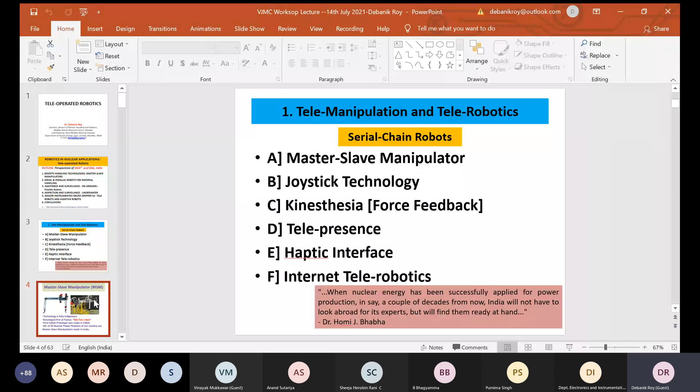So this is the first of our technologies, master slave manipulator, which we call MSM. This technology today is fully indigenous. We are very proud to tell you that this technology became fully indigenous over the years, though of course there was a lot of struggle along the way. Even in the world, it was first developed in France, known as the MA Telerobot.

The first Indian prototype was made in the 60s. We took a lot of input from this French telerobot, but the Indian one was a mechanical type master slave, the first ruggedized kind of system. Of course, those particular units are not in use in Indian power reactors these days, but it was our glorious past, you can say. All of the present 23 nuclear power reactors use master slave manipulators that are totally made in India. So that is the kind of structure we are right now having.

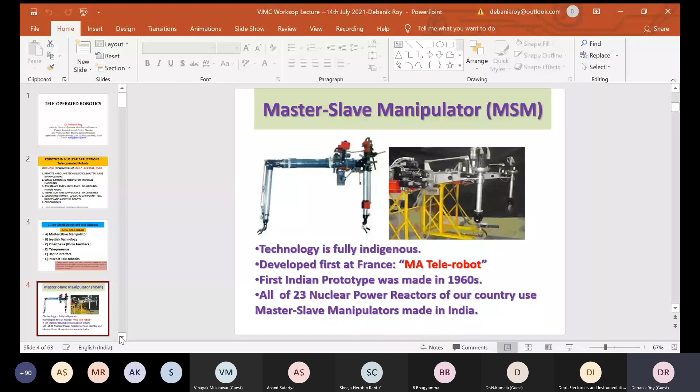Similarly, at more or less the same time as the French research, in the US at Argonne Lab there was also a development made - this is the Argonne Lab slave manipulator used at that time. There are some differences between this French and US version, and the Indian version is more linked to the French version - we took significant input from it.

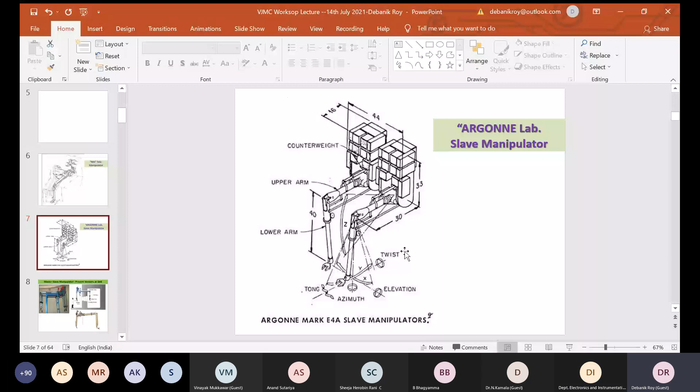This is the present version at DAE, these MSMs, and these three pictures are actually the development of the prototype that has been made fully in our workshops, and those are now in operation in nuclear power plants.

Essentially, the idea is like a master arm, which is being handled by an operator, and there is a through-tube, and there will be a kind of slave arm which is inside the hazardous zone. We generally call it a hot cell - hot doesn't mean temperature-wise, it's basically radiation hazard-wise. There is a viewing window through which we see whether the slave arm is doing the job perfectly.

If you look at these pictures, you will find some kind of peculiarity in the gripper part. This gripper of the master slave manipulator is totally different from a normal robot gripper, and the wrist also. Those are the things where we feel it is the best one.

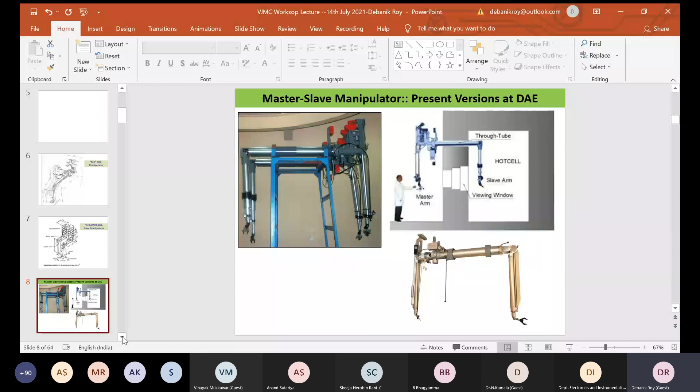Various configurations of master slave manipulators have been developed over the years in Department of Atomic Energy. Out of that, one interesting type is the gantry type, which was totally our own design, used for specific applications in our waste disposal facilities. This is one of our success stories.

A lot of R&D went into this. These were big projects in the early 70s and 80s, with a lot of analysis and R&D involved. We must keep in mind that the 70s and 80s were a dreadful period for atomic energy because we were under embargo, so we couldn't get good software or hardware, and everything was made primarily at home. All the analysis, like kinematic analysis and design, which are very important for any mechanical system, was done by our own engineers and technologists.

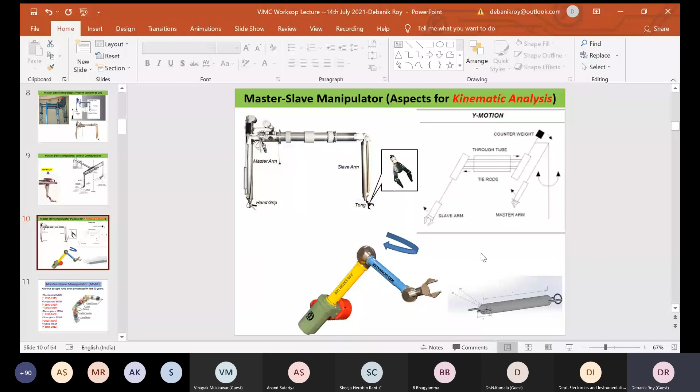That is the reason we started from scratch, and today this is an important milestone that we have achieved. As I was mentioning, in MSM, various designs have been prototyped over the last 50 years.

We started with mechanical type MSM from 1955 to 75, the first 20 years of DAE's functioning. We moved on to something more robotic, called articulated MSM, in the 80s and 90s, roughly 1980 to 1990. We also had an interesting development during that time called the servo manipulator or servo MSM. This was not prototyped for production since it was only for R&D use, and we didn't use it in the nuclear power plant. The next important development that went into power plant areas is called the three-piece manipulator, three-piece MSM.

From 1995 to roughly 2002, I was also part of the family, so I have particularly seen the developments of the 3-piece manipulator, 3-piece MSM. Then, of course, there was the 3 to 4-piece version. Not much difference technologically, but manufacturing-wise there were a lot of additions during this phase. That was the concept.

Finally, in the recent past, around 2010-12, the hybrid MSM also came into the picture. Essentially, the hybrid one and the 4-piece manipulator are more on the robotics side. We developed a lot of gear systems, gear motors, clutches, and other things for these. Whereas the mechanical master slave manipulator is totally mechanical, there was nothing other than rope and structures. Those are the differences that actually happened.

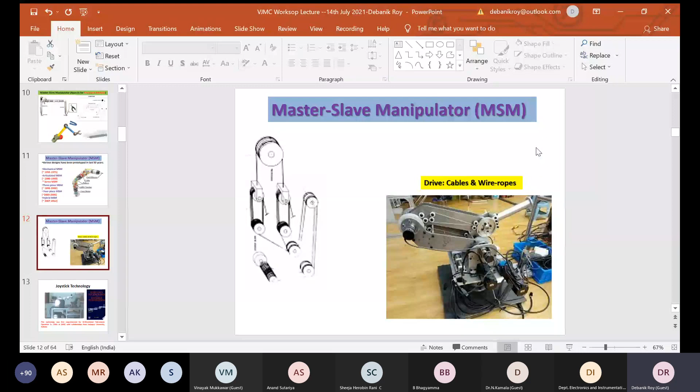Next is the joystick technology, another very interesting technology developed by the Department of Atomic Energy. This was first experimented during the 1990s at BARC in collaboration with Jadavpur University, Kolkata. I was part of this program, and this technology was very universal—through a joystick, or a kind of serial robot, we could operate various configurations of slave manipulator.

That was the need of the hour during those times—apart from master slave manipulators, we needed a universal device that could control various small-size robotic devices. You have to consider that the advent of robotics in atomic energy and nuclear power plant areas was in the 1990s. Many small robots were being thought of to be controlled, and joystick technology had a role in that. I am just giving glimpses because time is short.

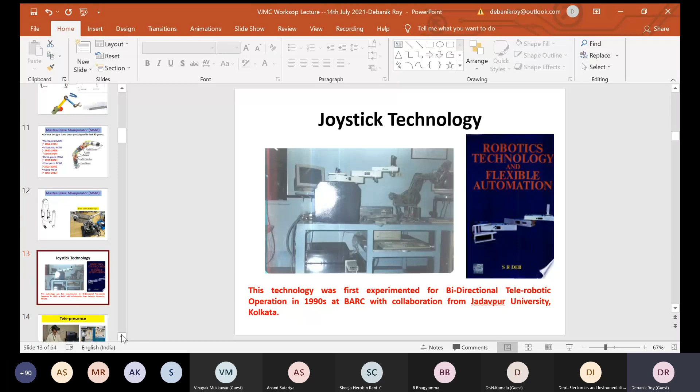Now, telepresence—the next technology experimented with in the later part of the 1990s, around 1994, at the Division of Remote Handling and Robotics, our primary division for robotics research at BARC. It was experimented with and we had very successful developments initially from the lab scale. Then we had advanced experiments with MSM around 2006 to 2009, as shown in the right-hand side photograph.

So a lot of advanced experiments we have done during that period. Haptic interface is another new technology developed with collaborations from IIT Kanpur in the latter part of the 1990s, I think 96, 97. Those were the days where we used to experiment with some collaborations, and collaboration was important for our procurement purpose, to be very frank, because embargo was still going on those days, so we couldn't purchase many things as we thought of.

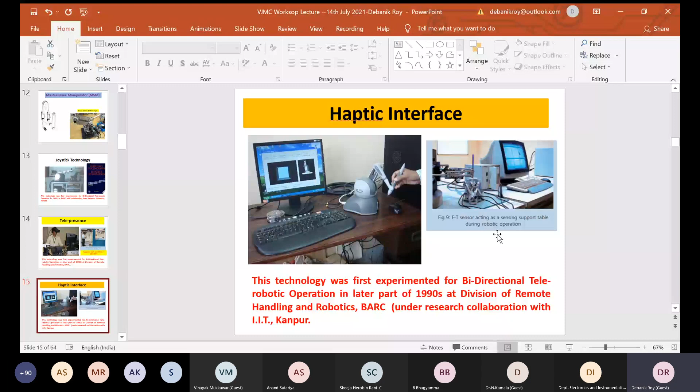Now there are many open problems even today, as our young engineers and scientists join, so we give them research problems. One area where we need good collaboration is modeling of cables and wire ropes, pulleys of master slave manipulators, modeling of the wrist of the master slave manipulator. These are areas where intense research is needed: modeling of serial chain joystick with chain sprocket mechanism, input of human factors in telepresence and haptic interface of master slave, and augmentation of software simulation with LabVIEW and MATLAB.

So these are the things used in our arena, and we feel this kind of progress has to be made with existing and known technology. So this is the area.

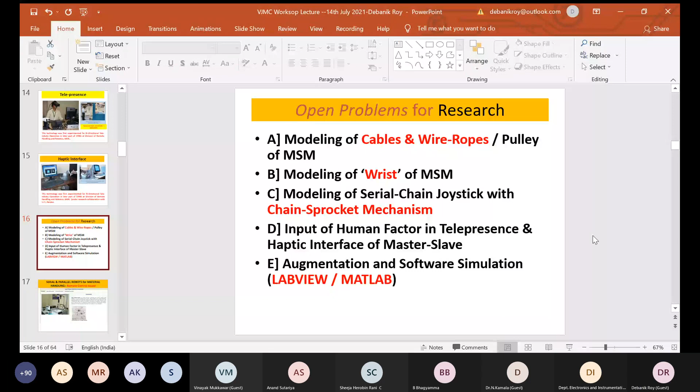With the advent of master slave manipulators and the knowledge acquired for remote handling technology, we started moving to a lot of serial and parallel robots for material handling, and these developments are all remote control based. Initially we did a normal control system, but then we switched over to remote control.

One interesting chapter of Department of Atomic Energy's robotics research is with parallel manipulators, and there are a couple of indigenous technologies developed in the Division of Remote Handling and Robotics during the early 2010s under the 10th and 11th five-year plans. Generally we do R&D in the five-year plan method; after the 12th five-year plan there is no more five-year plan. During those times, this was one technology that was fully indigenous, and we developed a lot of R&D input through that. In fact, it is well appreciated all over the country and the world also.

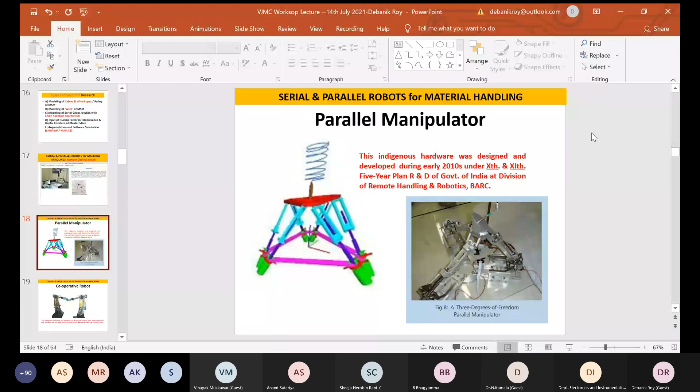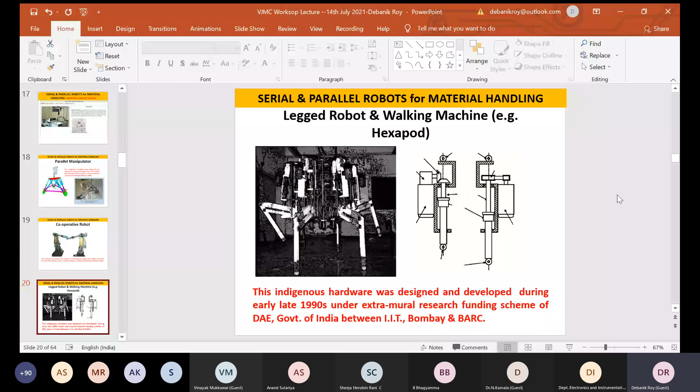There was another remote control, not remote handling I should say, with a legged robot and walking machine, basically the hexapod, in the late 1990s, where with IIT Bombay we developed this technology called Nataraj, basically the first Indian indigenous legged robot system. That was also one of our success stories, and there are other machines and prototypes developed after that, but the first one was Nataraj.

We have something in laparoscopic and surgical units also. Many of these technologies were first experimented with a normal controller, normal systems, but then we moved to some kind of remotized systems.

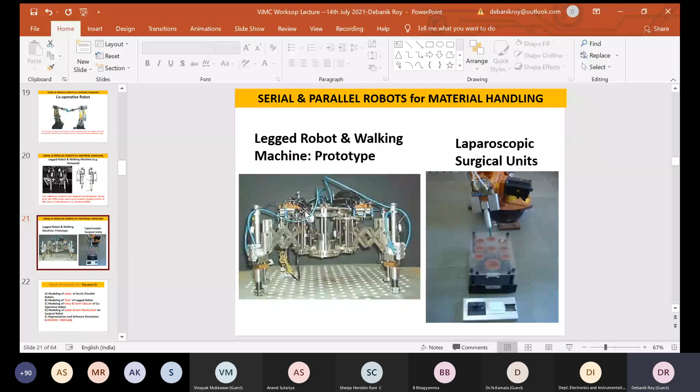So there are many areas where research happens in our establishments, like modeling of joints of serial parallel robots. Joint is a very interesting structure, giving basically the motion transmission systems and all. And modeling of gait of the legged robot, modeling of force and form closure of cooperative robot, modeling of cable-driven mechanism for surgical robots, and again the LabVIEW MATLAB augmentation.

This part we are very much stressing in our young engineers and scientists: you have to augment with some well-known software platforms, and these days a lot of open source control algorithms are available. But this glimpse I am giving is from when it was not so common, that is the early 2000s and that kind of period.

Let me take you to the next level of journeys of Department of Atomic Energy, where personally I am totally involved, and this is my project only. For the last 10 to 12 years, I've been mostly engrossed with flexible robots development, basically for assistance and surveillance purposes, which the Department of Atomic Energy needs very badly.

From our initial development, some of the flexible robots today have a kind of remote control based system, starting from Wi-Fi, and we've developed up to that level. There are indigenous hardware and design. So A to Z is kind of indigenous here. I can say it is my own, and some of my team members were also there.

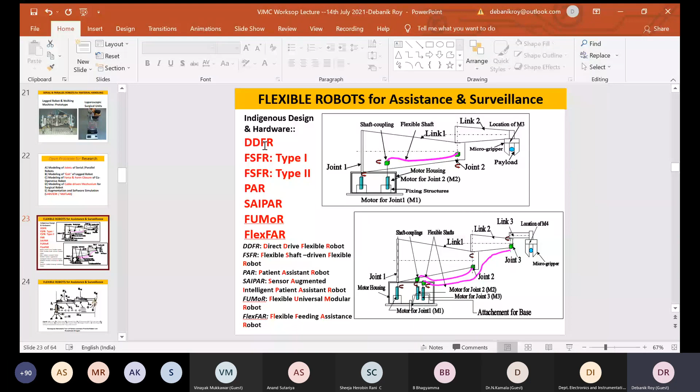So this is the total gamut of our flexible robot research, which started with DDFR around 2008-9, and then the other things started, and the latest, a few more, we just completed this year only. So this is a general picture, a kind of conceptualization.

This is a schematic view of a patient assistant flexible robot with a gripper. We can have this kind of structure, with motors placed at the different joints. Of course, our prototype patient assistant robot is not with motors at the joint—it was motors at the base, and then we can have it with a flexible shaft. We are moving it actually.

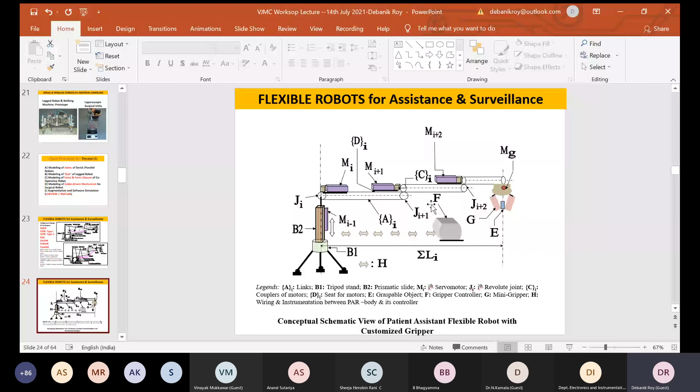Now, from a theoretical point of view, there are many fundamental things associated with flexible robot technology, because we have to design the link, the flexibility aspects, and of course how to control it. As you can see, this is very sleek and slender, so controlling that thing in real time is a big issue, and that particular aspect has always haunted us.

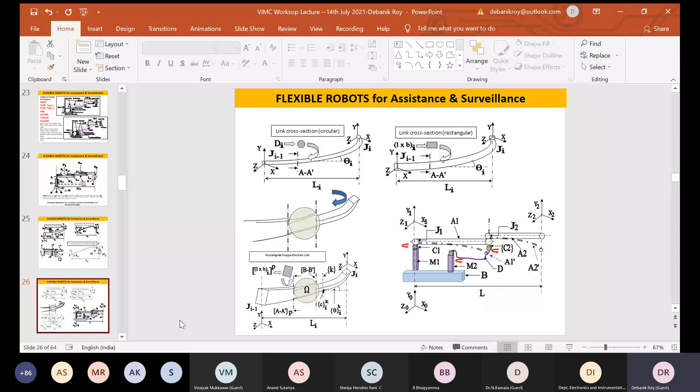A lot of indigenous effort went into controlling this vibration of the flexible robot, and many theoretical paradigms and modeling went into this structure. Here I'm giving a schematic diagram to show how the cross section changes—we can have a circular cross section, a rectangular cross section, some stepped configuration, etc. So there are many variations possible, and these give details of our activity.

This particular structure has a kind of tripod structure, which gives a vertical motion so that you can adjust the height of the robot where it is working. As you know, if it is a patient assistance system in healthcare, in hospitals, we need to adjust according to the patient's bed. Even for surveillance, we need to adjust the height and see the locations depending upon the structural things.

One important idea - some of the photographic views are available with the DDFR type of things, which is our first development, and this was a very success story. This particular joint assembly is being made. We have used Faulhaber Swiss miniature motor and the controllers also. All those controllers are bought out items - the controller of the Faulhaber and the motor itself - because that time we were a little fortunate that the embargo was partially withdrawn, so we could get some overseas motor. Of course it is from Switzerland, so there was not much of a problem, but even then we could do it.

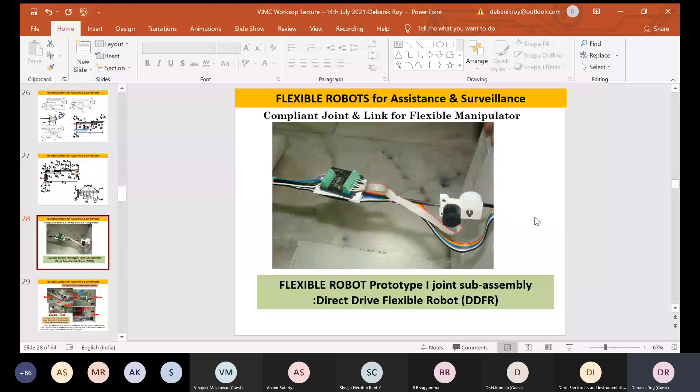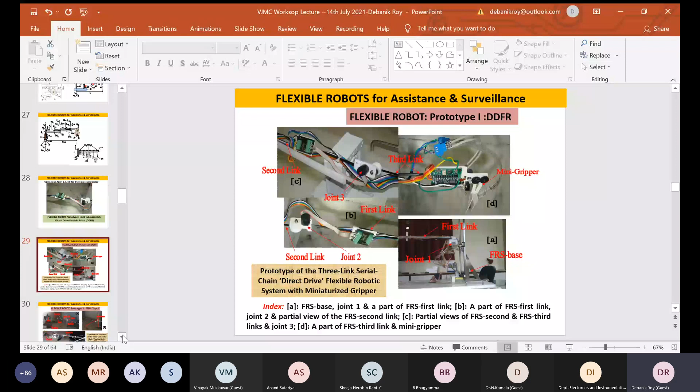Now, with the success of DDFR, we moved to the FSFR type 1 and type 2. The concept was, can we have some kind of unification of the joint systems, and can we place the joint motor at the base itself? That was the concept, because in the earlier version, if we place the motor along with the link, the weight will increase, causing more deflection or other problems.

So with that idea, our FSFR type 1 design came, and these photographs are all inside our laboratories and work zones. These motors were placed at the base, and then we could see the full system. There was a very miniaturized gripper at the end, with a 3-link system. We experimented a lot of things.

This FSFR type 2 was a little more advanced, where we changed the material of the link. In FSFR 1 we used aluminium to have a proof of concept, whereas in FSFR 2 we used a more lightweight but stronger material called CFRP, carbon fiber reinforced plastic. We have papers and other material available, and even two YouTube videos where you can see this - I will show the video also.

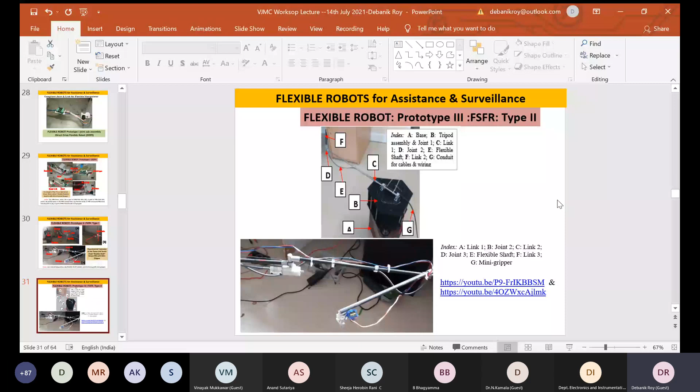So these are some of the details of FSFR, and then we move to the next version, which is PAR, the patient assistant robot. Whatever problems we faced in FSFR 2, we removed in PAR. In PAR we actually moved with a kind of technology for its tripod mechanism and vertical up-down motion. That was the criteria where we could concentrate more, and also our indigenous controller. So that was the difference between FSFR 2 and PAR.

So these are all chronological - one after another we started and conceptualized. As I mentioned, the DDFR program started around 2008-9, and then we experimented with all those things. Then we slowly moved to FSFR type 1, but there was a considerable gap because we were not very sure how to get the flexible shaft, and it was not available those days. So some time was lost in that. Anyway, then we picked up, and I think from 2015 onwards we could get all the materials and started again with full pace.

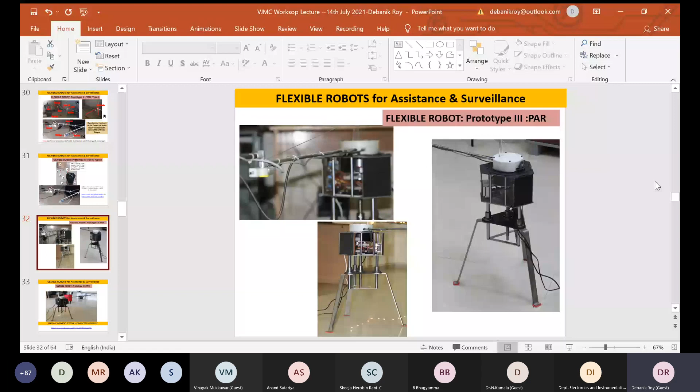This is today's prototype of PAR, patient assistant robot, which is fully operational and functional in our laboratories. This is the complete prototype, which has got a YouTube video also. There was a technology partner in Pune who helped us in developing the full system based on our design and parameterization.

With the success of PAR, the working prototype, we moved to another interesting project in the later part of 2018. This is called SAIPAR, Sensor Augmented Intelligent Patient Assistant Robot, and a lot of modeling went into it. This prototyping is in progress right now, but we have changed several items, from the joint to many other small things, to make it more versatile and more receptive. It is intelligent in the sense that we have designed many sensors for it. It depends on the technology - now we are having a lot of advances in sensor technologies, controller technologies, software. So those aspects also come into the picture, and the augmentation becomes a reality.

So we are taking help of that. From the simple joint of our joint design, we move to many advancements of the Revolute joint here. Even the gripper, etc., is being changed.

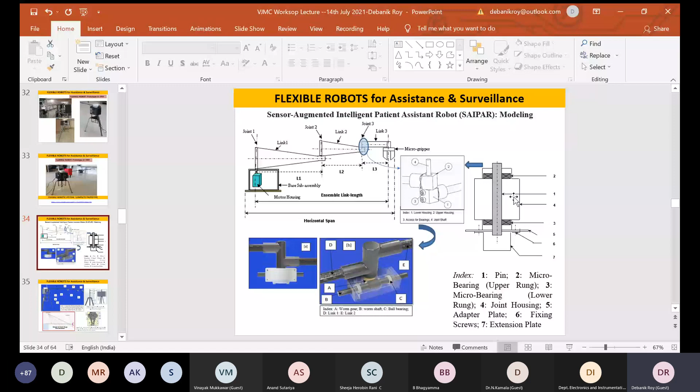The scheme for strain gauge instrumentation - the instrumentation part is more in this SAIPAR version compared to mechanical. Mechanical is more or less the same as PAR, with minor modifications in joints and other things. But the main thing is the sensor instrumentation. We have mastered the technology of strain gauge instrumentation over the years, and this is quite our own indigenous development. With the presence of LabVIEW software, we could do all the calculations, deflection measurement, and all those things.

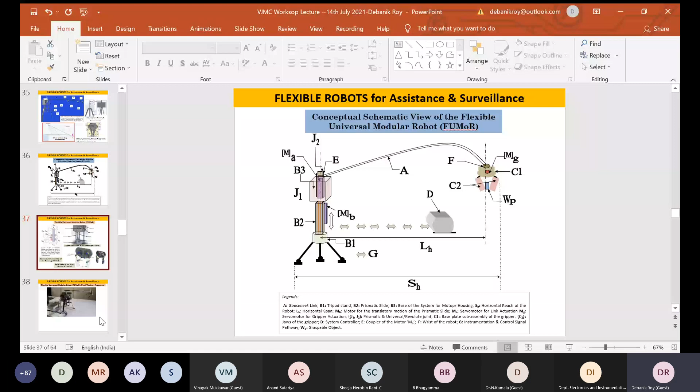So that we can put it at different locations also. With FUMOR, there are some changes in the joint housing and this tripod mechanism, even the solid modeling for the grippers, and there are some changes in the gripper also. I'm not going into the details of that because it will take time.

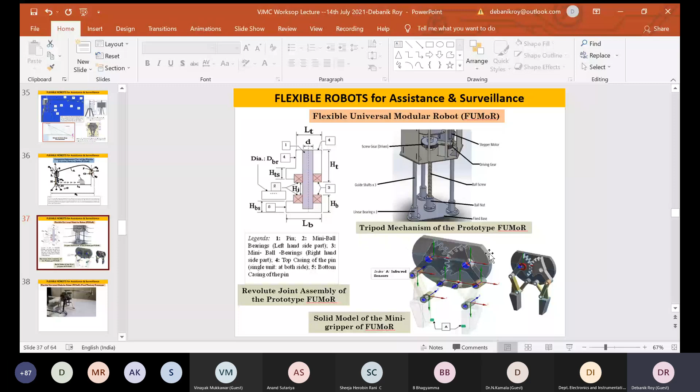But basically, with some structural changes compared to PAR and SciPAR, in the FUMOR we could achieve this condition, and this is one of the photographic views, and you can see the cuteness of this fellow. It is totally on the table, and it is very small but very effective in gripping and grasping.

So this is our latest development, and another project which is already running as per schedule is called FlexFAR, which is Flexible Feeding Assistance Robot, and there are one or two designs available. This is one design where, based on the success of FUMOR, we could make it multi-joint or multi-link, you can say multiple gooseneck. That was the idea, and we could develop that.

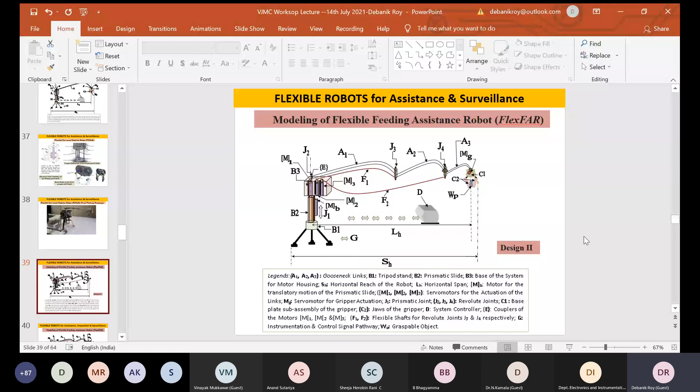There are two designs basically. One is with a kind of straight link for the gripper, another is a moving flexible gooseneck link for the gripper, because we did not know how they would perform. Because of the gooseneck structure, there were some changes in the joint actually, and that is also very important.

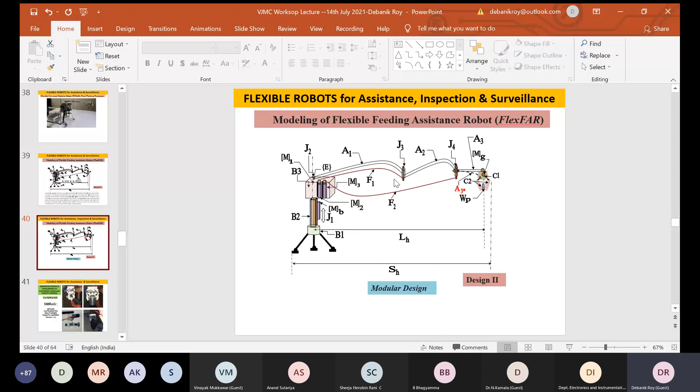The idea of flexible robots and their use in the Department of Atomic Energy program is basically for gripping, because worldwide in a lot of laboratories flexible robots are studied, but they basically study it from an academic point of view. Our application, our focus is on the application, and that is the reason we need grippers.

There are many small grippers, as I was mentioning, in the DDFR also. There is a small gripper, and that is also quite small, just like this FlexFAR gripper. The DDFR gripper gave us confidence that we can do some small manufacturing. Of course, there is a lot of difference between the manufacturing - as you can see, the DDFR is almost 7-8 years ahead of FlexFAR.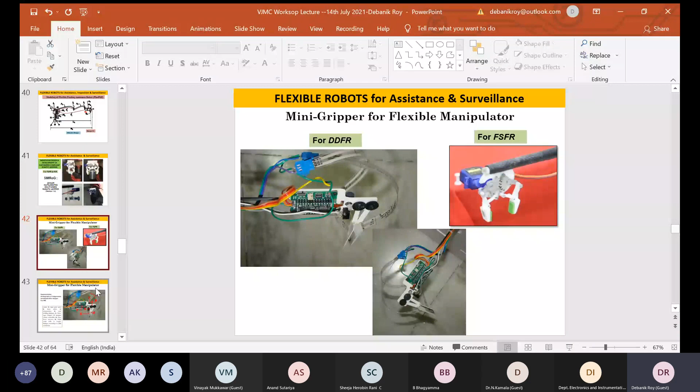So the manufacturing technology is different for DDFR. If I make the DDFR today, of course there will be some advantage. Whereas in FSFR, mainly rapid prototyping techniques were used. In this flexible kind of gripper system for DDFR, it has got its onboard controller here. That is a good part, which was not there in FSFR because of the size limitation. Rather in DDFR, we could use the extended portion of the gripper base plate, and we placed the controller there itself.

At the same time, we could see the sensor length and all. So that technology versus time curve is important, actually. We couldn't avoid a very small, long length of sensors, which is not there in our present design. So this is another version of that DDFR gripper.

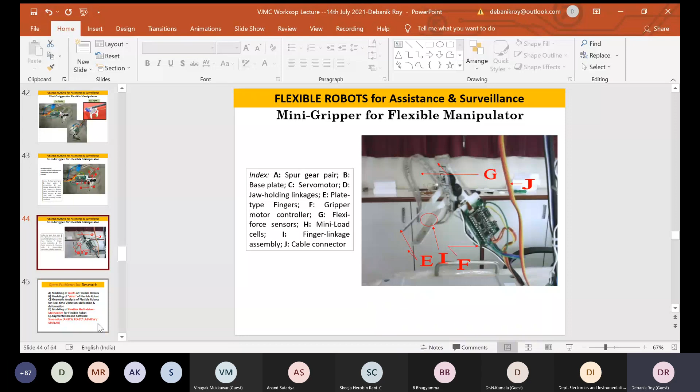There are many research problems, because it is kind of an open system, and I give a lot of projects to the juniors. Modeling of joints of flexible robots is an interesting study one can carry out. Modeling of the wrist of the flexible robot is also another interesting part. Kinematic analysis of flexible robots for real-time vibration, deflection, and deformation studies. Flexible shaft-driven mechanism, how to model it, is also very important.

And also the software augmentation, because this time we need ANSYS and FEAST, finite element softwares. ANSYS we all know, and FEAST is our own homegrown software by ISRO. So both with ANSYS and FEAST, and of course our lab systems are there.

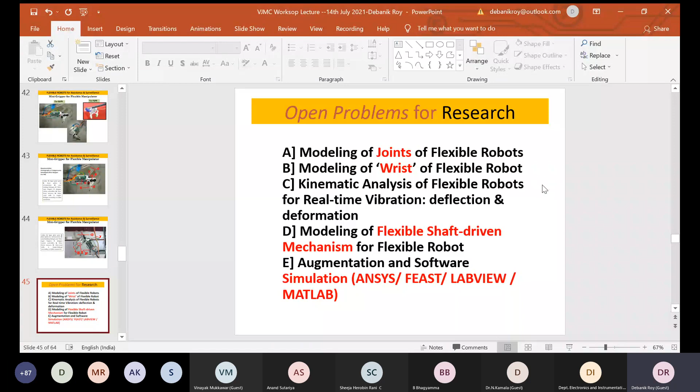Let me move to the last segment, micro. This is the interesting part of DAE's program. We have developed a lot of robot grippers over the years, which are teleoperated, remote controlled, remotely operated. Many things are there, and there are several designs of the jaws, as you can see, from a straight jaw kind of system.

Which is my own design during 2006-7, I believe. And then there are my recent developments with curvilinear jaw, with metallic, non-metallic, and another combination of metallic and non-metallic. So these 4 jaws, 4 grippers with curvilinear jaw of different shape, size, and dimensions, I have developed. But the starting point was this, my own drawing development kind of thing.

And similarly for the straight jaw kind of thing also, we developed this, which was the primary development of the micro gripper. As you can see, today's micro gripper, whatever photographic view I have shown in the earlier slide, this is the mother of that particular design, actually. So I thought of this much of gear train. Anyway, so these are the things.

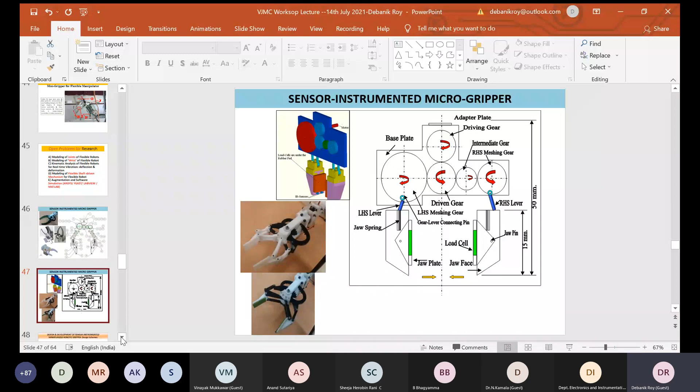And similarly for these straight jaw grippers also, several kinematic chains were studied. So this was all with our technology. And this gripper design includes gripper for small payload serial manipulator, gripper for parallel manipulator, and gripper for multi-segment compliant robot. So all those things.

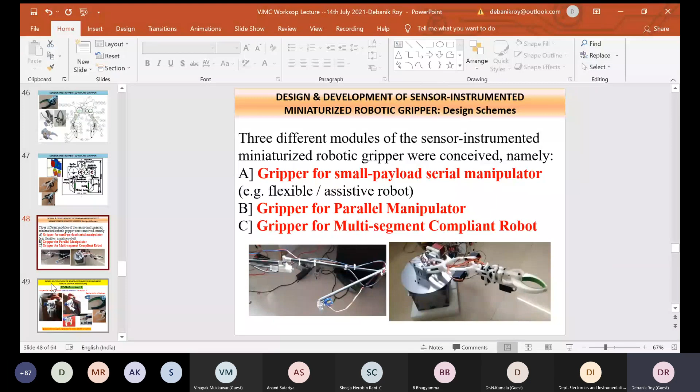This is one of the robots that was developed around 2017. And this uses a curvilinear jaw, and it's kind of a little bit of a compliant robot, I should say—some compliance is there in the link. So that was developed. I think some of the pictures I have already shown, but basically, these are all SIMRoG version 1 in action.

And replaceability of the grippers is also done. And the external dimension is, as I was mentioning, very small.

And SIMRoG version 2 is this picture, where this is the final prototype of version 2, which is fully sensor instrumented. With this small volume, we have used some 4 kinds of sensors, and there were some structural models also, with a slight increase in the length, which is 66 millimeter, width 44, and breadth 15 mm. Breadth is the same, so a little increase in width and length, we would have a payload capacity of 1 kg.

We can start with all these developments, and these developments have fully indigenous technology, and we have used those things. So I think these are some of the videos I can probably show you.

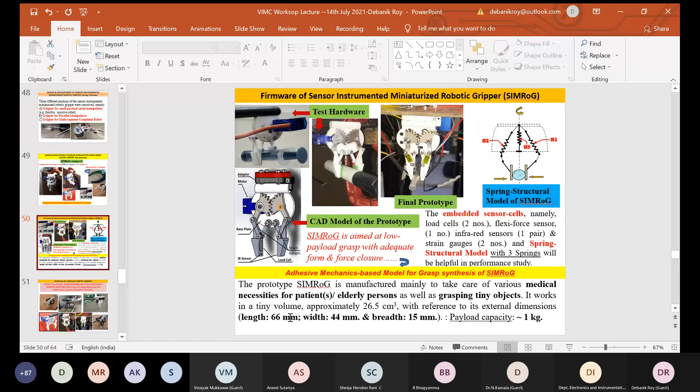So the compliant robot that I was mentioning...

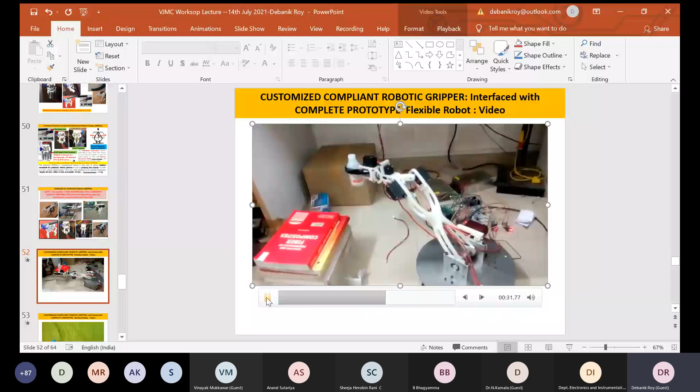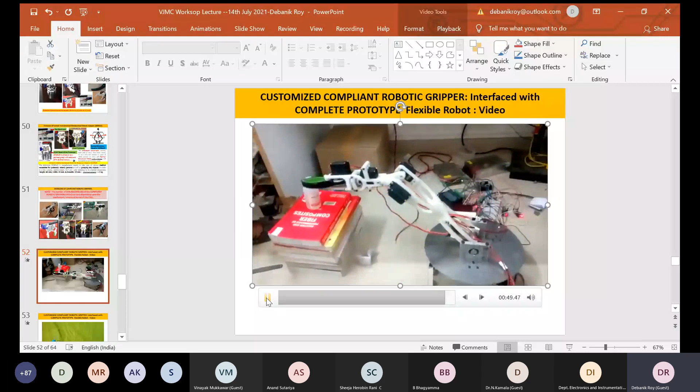The second one is also another interesting compliant robot, but with some modifications from the previous one. Here also, I'm showing the chronological steps.

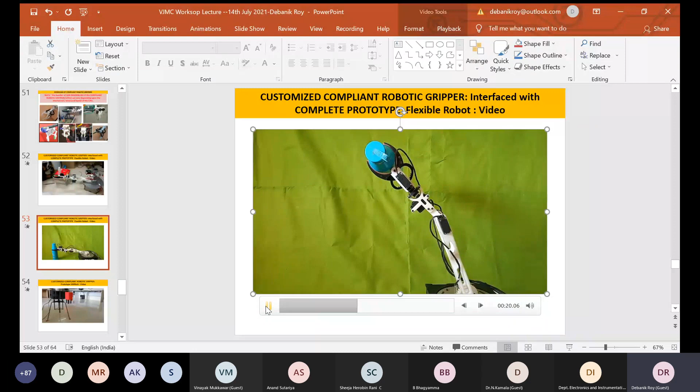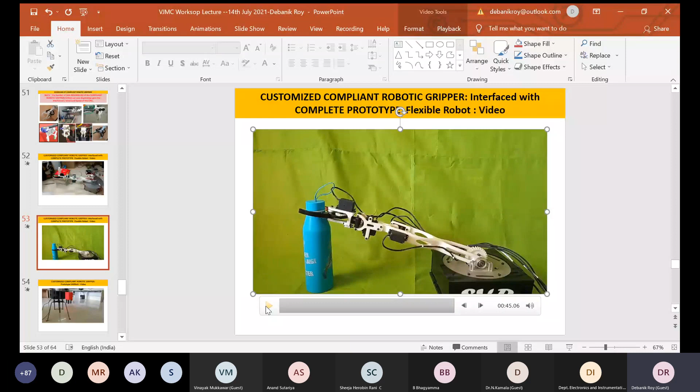So these two grippers, and these two robots rather, differ not only in construction but also in control technology. As you can see, there is much improvement in their gripping postures, and they can go to a much greater height. So those things are possible with developmental activities, and sometimes this is for our patient assistant robot, which is a fully working prototype.

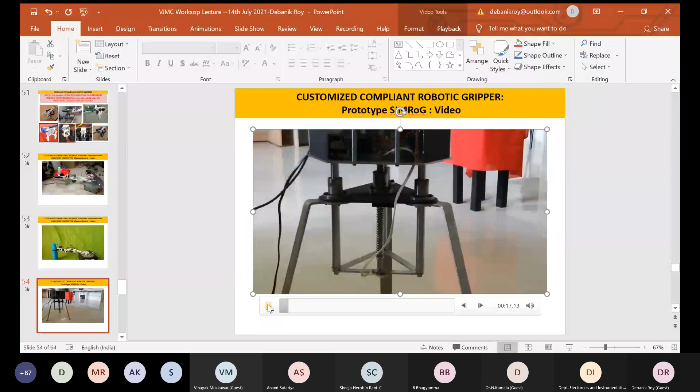Different motions will be shown here.

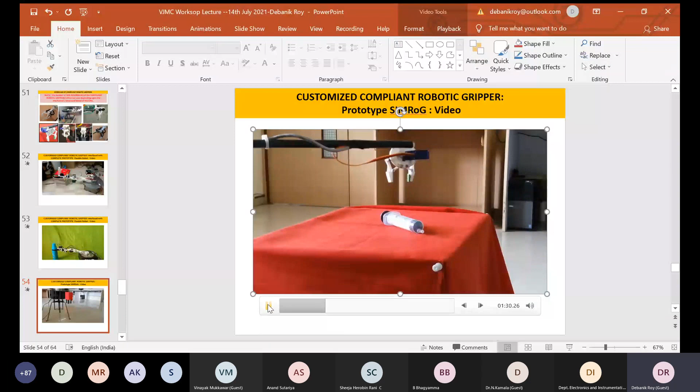And to tell you one interesting part, this is fully open loop control.

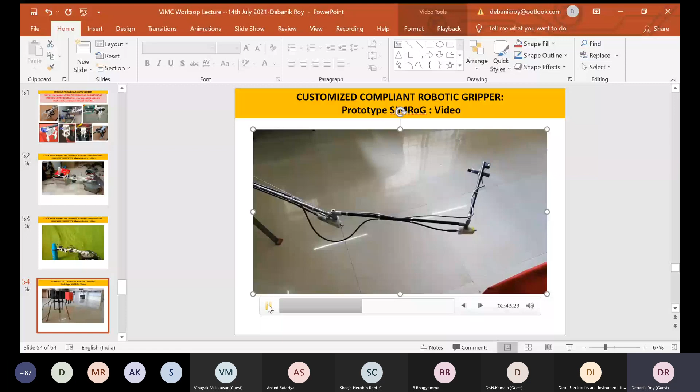The most important part is the joint maneuverability and the programming aspect also, which is, as I was mentioning, fully indigenous.

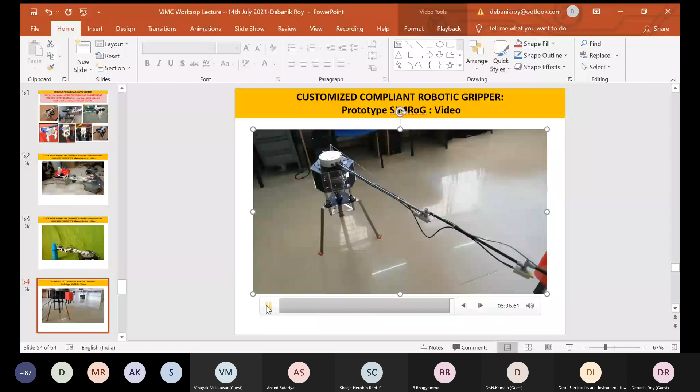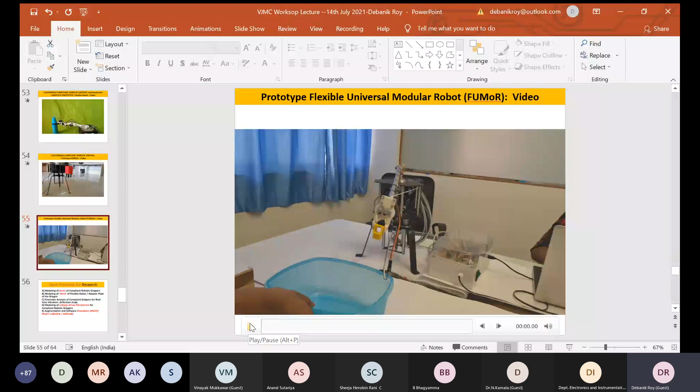Well, this is our latest development, tested a month back by me, and it is a rush video, not a fully professional level video, but I would like to show you how it is happening. You see it is already gripped on an object, the yellow colored object, and this is a single link system, but with a bend.

You can have a lot of bend possible in the flexible link. It's a gooseneck kind of link. So this is our first attempt, and the gripper has some novelty also compared to the earlier gripper. This is the technology that we are already confident enough to go forward with.

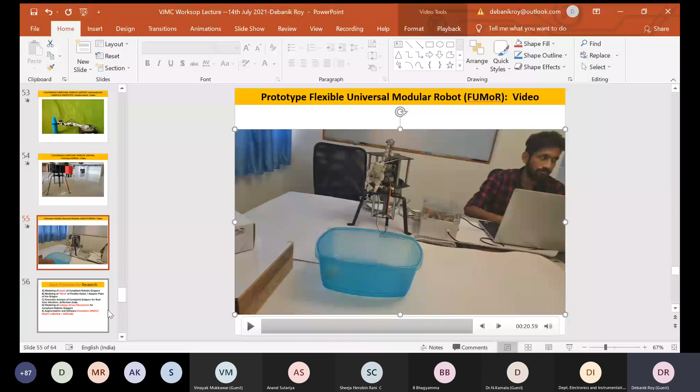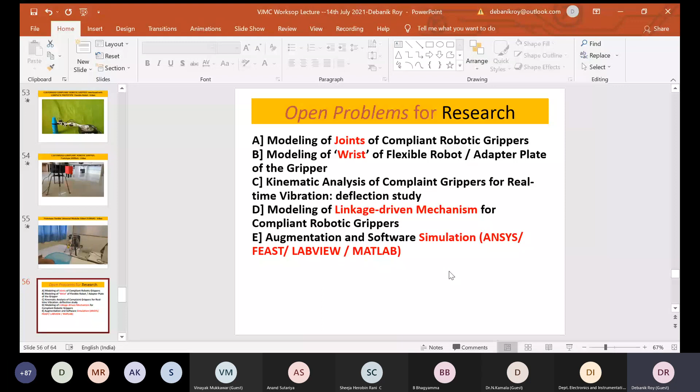Now I will take you to the last part of the journey, which is basically future research. In the future research at DAE, we have two major projects that have been thought of with my supervision. One is robotic surveillance of spent fuel storage bay pool with a customized robot. The idea is a surveillance type of activity with a customized robotic system with a customized gripper in our atomic energy area. Project 2 is for social health care, which is design and development of a patient assistant flexible robot fitted with customized grippers.

So based on our success of the PAR, now we are attempting customized grippers. That means there will be a turret kind of system where multiple grippers will be there. So that was a project that has been conceptualized, and we are hopeful that we'll be doing it.

Now, the first one we call CAR, Compliant Articulated Robot. It is basically some kind of inspection system, inspecting the tag number of the spent fuel rods. In fact, IAEA has a similar project, but they are not doing it with an articulated robot - they are doing it with some kind of floating robot, and that was a very recent project they floated. We want to estimate the overall thermal condition of the spent fuel, assessment of the remnant radioactivity, etc.

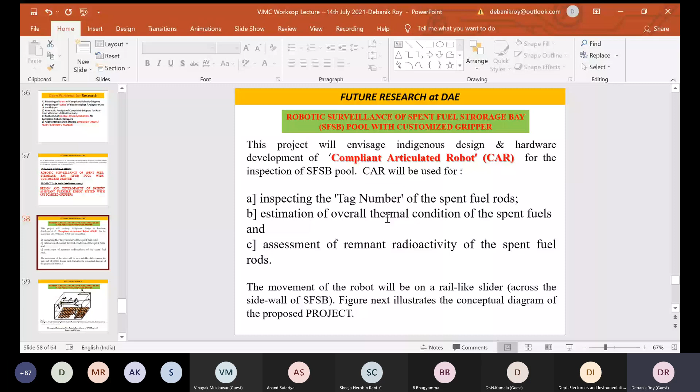In case of the Patient Assistant Robot, PAR, we already have seen the activity, so we are quite confident about the technology. Only thing, it needs more customization now, with a customized gripper. We have thought of having this kind of thing.

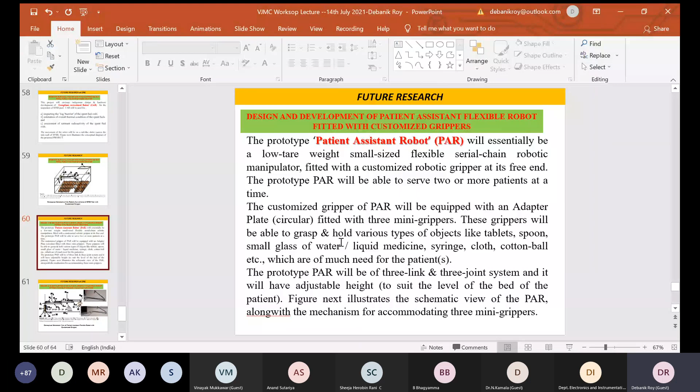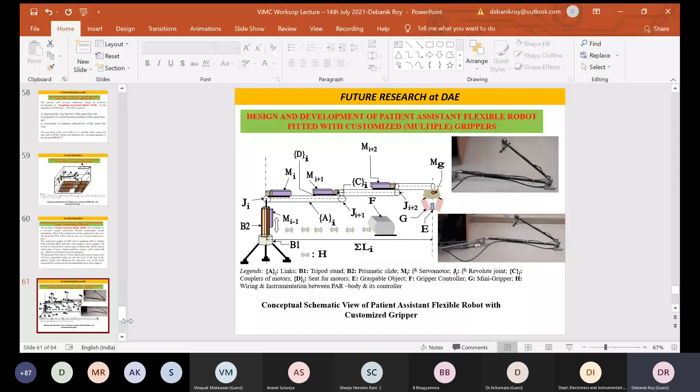Also the other things like flexibility assessment, judgment, and modeling will be more or less common, but we'll have simple spring systems and also spring-dashpot based systems for modeling. So both of the systems will be tried.

The conceptualization of the multi-gripper system is something like that - there will be some 3 grippers with a kind of turret sort of system. This is the first time we will be trying this. We want to make a small test bed first, and then we'll go for it. So this is the plan as of now, but this is a little futuristic - maybe in another 5 to 7 years, we'll be able to show the real prototyping part of it.

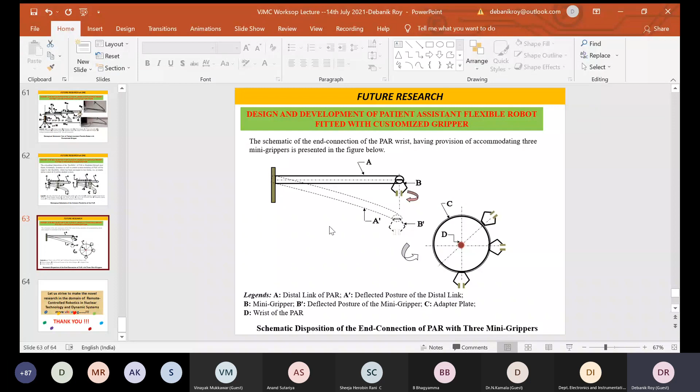The idea is that this is a novel research area, no doubt, in the domain of robotics. But remote control robotics is another area where, of course, the Department of Atomic Energy can be the torch bearer.

We have a plan of collaboration through different forums, including the Department of Science and Technology, Government of India, and other forums, so that we can go ahead with more advancement in technology and more novelty of the systems. So with that, I am ending my lecture, and I hope this was useful. In case you have any questions, you can ask now, or email me afterwards. Thank you very much.